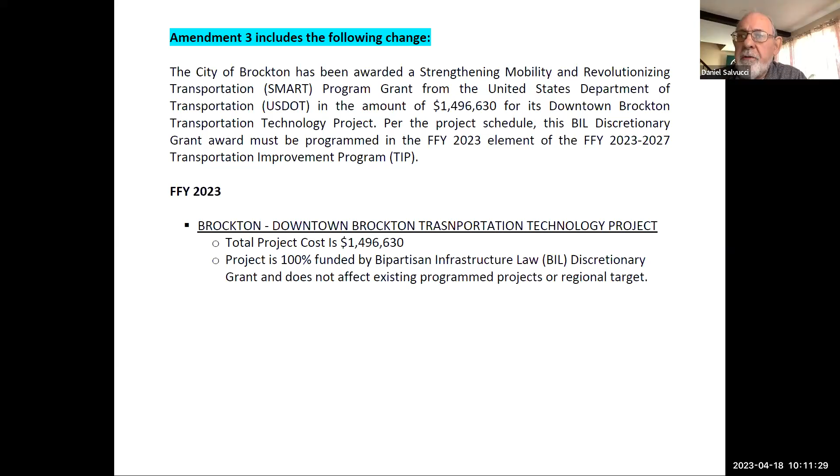Thank you, Bill. Any questions for Bill or the city? Seeing and hearing none, can I get a motion and second to release as presented today? I'll motion, Dan Salvucci. Is there a second? I'll second, Becky Coletta. Motion has been made and seconded.

Please call the roll. David Mohler, yes. Sean Handy, yes. Kamaya Parkin, yes. Lee Hartman, yes. Dan Salvucci, yes. Great job, by the way.

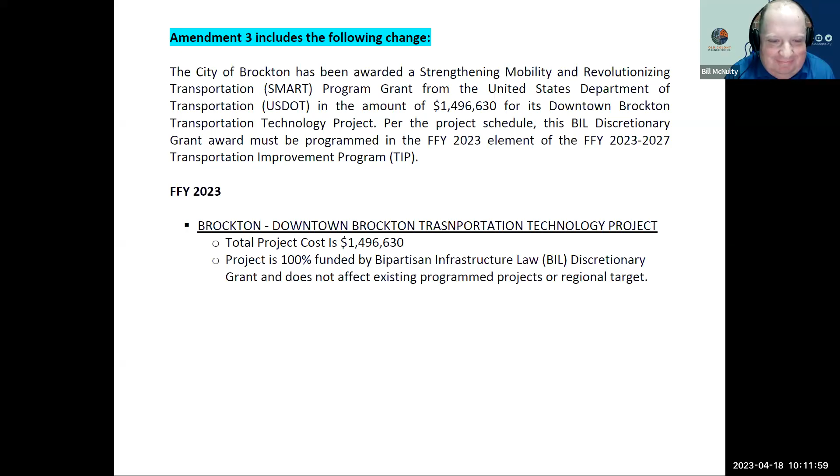Glenn Guyler, good, an enthusiastic yes. And Becky, very good, Coletta, yes. Motion carries. Thank you. Yeah, congratulations to the city.

Next item on the agenda is the development of the 2024-2028 Old Colony TIP.

Today I'm presenting the draft FFY 2024 to 2028 TIP that we're seeking to send out to public review and comment period. As you'll recall, at our last MPO meeting, we determined a preferred set of highway projects for this TIP. Since then, we've been preparing the actual draft document, and we're ready to send that out to public review and comment period. As you can see on the screen, the highlights of this TIP are $173 million in highway and bridge projects, and over 41 million in transit projects.

So we're very, very excited about that. If you want to go to the next page, Sean, thank you. I'll just walk through each program year and highlight what's programmed each year. In FFY 2024, City of Brockton has intersection improvements at Center Street, at Cary and Lyman. Also in Brockton, Route 123 at Plymouth Street, with signalization improvements there. In the town of Plympton, we have a bridge replacement project, the bridge on Winnetuxet Road over the Winnetuxet River. And in Stoughton, as I discussed earlier, phase 2 of the Route 138 corridor project.

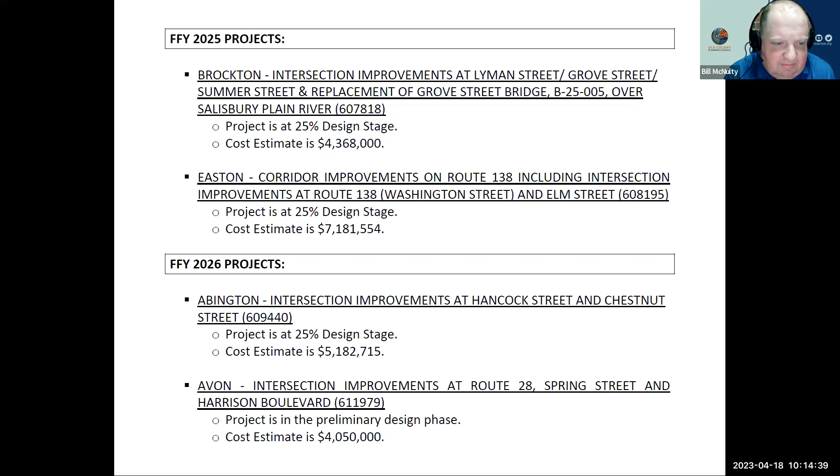In FFY 2026, we have in Abington, intersection improvements at Hancock Street at Chestnut Street. And in Avon, intersection improvements at Route 28 at Harrison Boulevard and Spring Street. That's a major safety improvement project, so excited about that.

Next one, in Duxbury, traffic signal installation at the Route 3 ramps at Route 3A, right on the Duxbury Kingston line there.

FFY 2027, we have a project in Abington, intersection improvements at Randolph Street and Richard A. Fitts Drive, which is Route 139 at Chestnut Street and Old Randolph Street. In Hanson, we have a corridor project, corridor improvements on Route 14. In Duxbury, we have a bridge replacement, the Powder Point Avenue Bridge over Duxbury Bay, 70 million.

And then finally, in FFY 2028, we have a project in Abington, intersection improvements at Route 18 at Route 123. In City of Brockton, intersection improvements at Route 123 Belmont Street, at Pearl Street and Stonehill Street. In Duxbury, this is phase 2 of that Powder Point Avenue Bridge replacement.

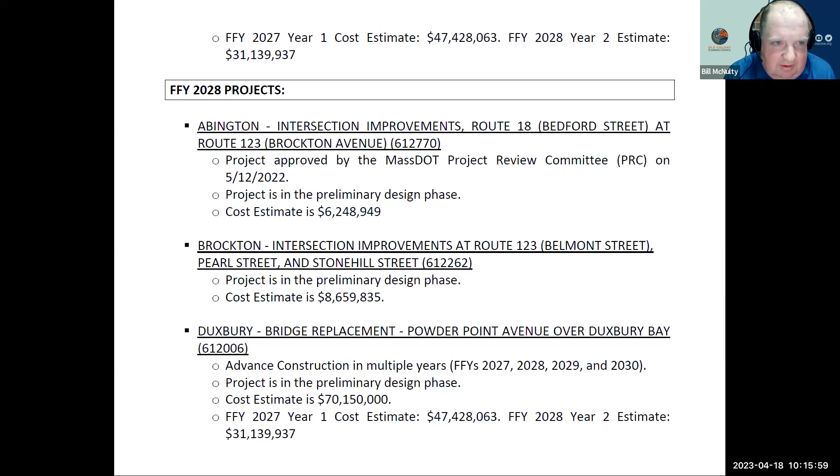Next page. In Hanover, Route 139 corridor improvements, right there in the town center, at Main Street, Center Street, and Silver Street. In Kingston, bridge replacement, Smith's Lane over Route 3. And in Stoughton, intersection improvements at Canton Street, School Street, and Summer Street.

So all these projects, right now, as of right now, they're looking in good shape to meet programming in these targeted years.

This set of TIP projects was developed in full cooperation and collaboration with stakeholders and project proponents. And we got a good mix of projects here, and I'll note that this is just the highway side that I'm presenting here, but on the transit side, we have some great transit improvements as well.

In addition to the normal maintenance and operation stuff, I think the centerpiece of this TIP, at least on the transit side, and Glenn alluded to this earlier, is moving towards a zero emissions fleet system. So incrementally phasing out their diesel and hybrid buses and replacing them with fully electric buses. This TIP accommodates the purchase of several of those electric buses, which is very exciting news for the region, air quality, and all that good stuff.

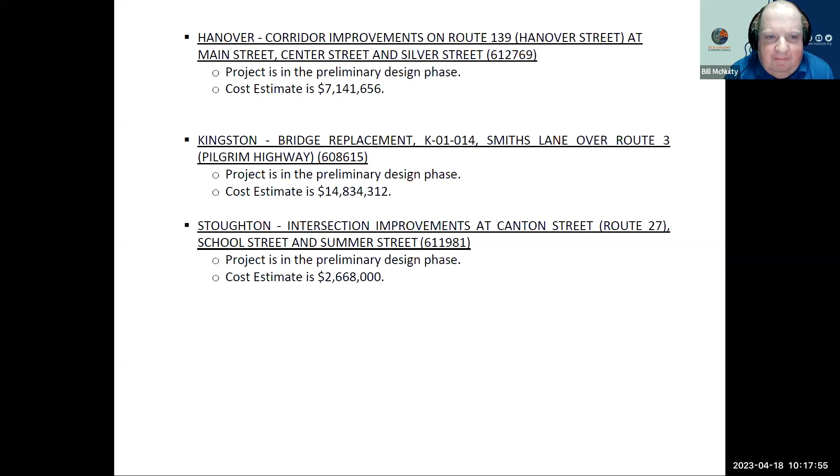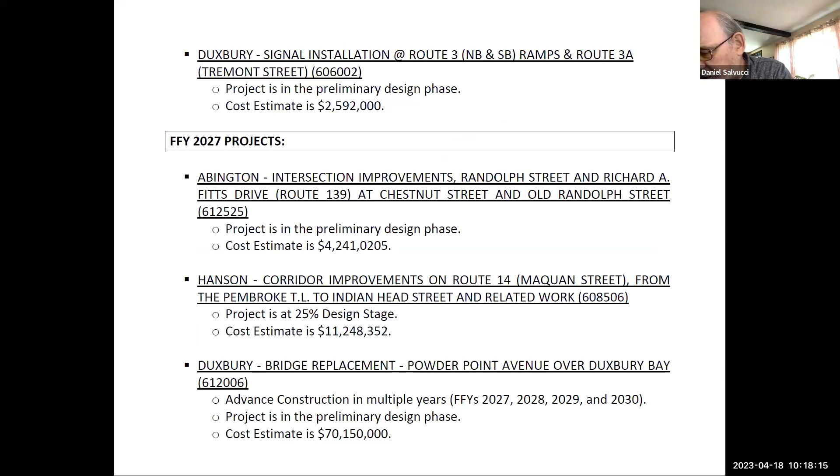Thank you, Bill. If I may, go ahead. Question, Dan from Whitman. On the Hanson project on Route 14, I know it's still at 25% design, and I know there's some issues with the towns dealing with it. Has there been any movement at all? I'd like to report back to Don Howard and let him know exactly what's going on, where he introduced this project years ago.

Yeah, so there's definitely a lot of activity behind the scenes. Right now, I know the town is still working to secure funding for an underground utility exploration that needs to be done. And then beyond that, there are some right-of-way issues that the town will need to address, but there is definitely movement on it, and there's a lot happening behind the scenes.

Okay, I'll let Don know. Thank you very much, Bill. Any other questions for Bill? I have a question.

On the Duxbury Bridge, Powder Point Bridge project, the 70 million, does that count against projects, or is that separate money? I know we've heard about it and talked about it in other meetings, but I just can't remember if it comes out of our regular TIP money or if there's special money for that bridge.

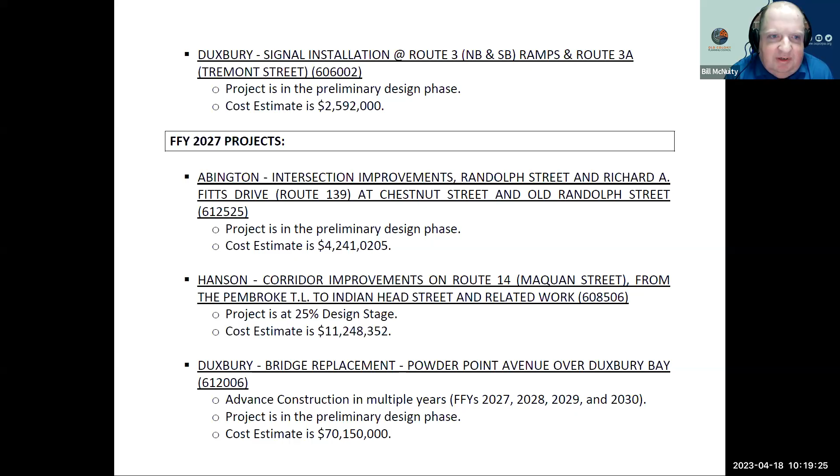Yeah, that's an off-system bridge project, so it's not coming out of the regional target. It's kind of separate money. So it's programmed in our TIP, but it's not coming out of our regional target. That's what I thought, I just wanted to make sure. Good, thank you, that's good.

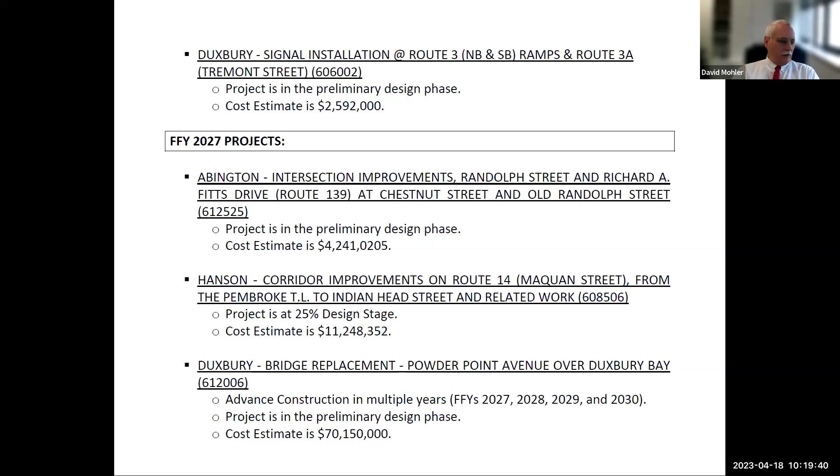Yeah, any other questions? Seeing none, can I get a motion and a second to release the TIP as presented today for a public review process? I'll make that motion, Dan from Whitman. Is there a second? Is there a second to release the TIP? I'll second. Second, thanks, thank you. Motion has been made and seconded.

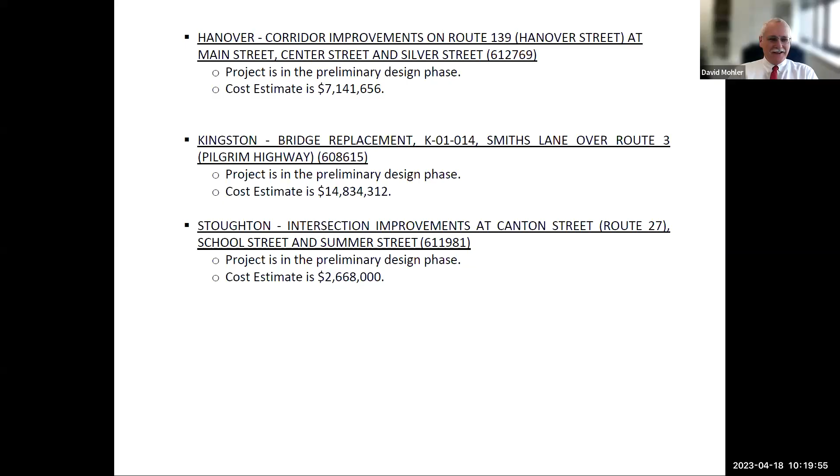Please call the roll. David Mohler, yes. Sean Handy, yes. Kamaya Parkin, yes. Lee Hartman, yes. Dan Salvucci, yes. Glenn Geiler, yes. Becky Coletta, yes. Motion carries. I'm trying not to talk when my dogs are barking.

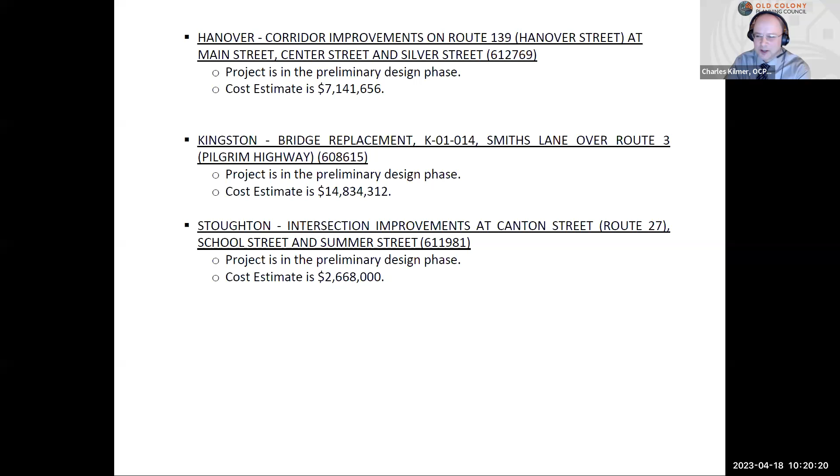We are a pet-friendly office, so... Is it a service dog? I don't know. Thank you, everyone.

Thank you. The next item on the agenda is a discussion of the certification of the Old Colony MPO transportation planning process. Is this you, Charlie? Yes, thank you, David.

So on an annual basis, one of the items before the MPO is a self-certification of the Metropolitan Transportation Planning process. There are several items where the MPO self-certifies compliance with the Metropolitan Planning Regs, such as having an anti-lobbying statement, and operating a process in a non-discriminatory manner.

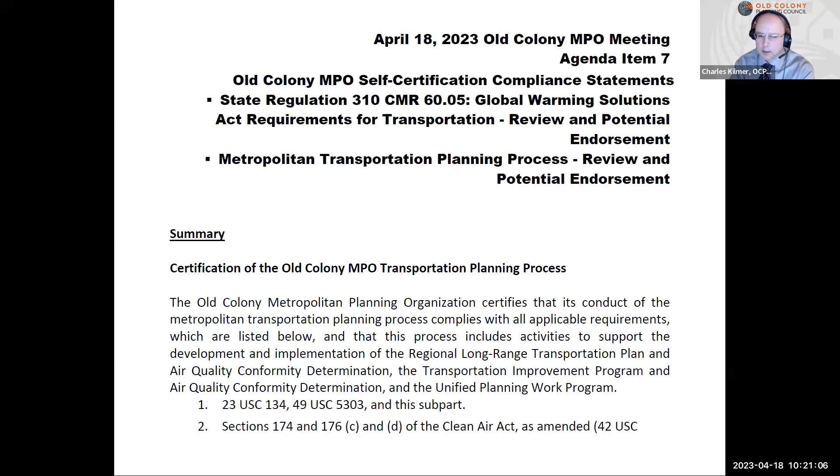Next slide, please. You can see several items here through item 10, compliance with the Older Americans Act, and so forth, including Section 504 of the Rehabilitation Act.

As you see these on your screen, these are things abided by the staff in its metropolitan planning process as we develop the TIP, the long range plan, the public participation plan, the unified planning work program, and in our day-to-day operations. You might be asking yourselves, well, who ensures compliance with these?

Our friends at USDOT, through the Federal Highway and Federal Transit Administration, conduct a transportation planning certification review every 4 years, where they go through these items and look for specific documentation of how we're implementing our process in adherence to these. Next slide, 11 items.

As luck would have it, we have just started our federal transportation planning certification review with our federal partners, and it's likely to conclude sometime in August with a final report.

I would also say that our partners at MassDOT, through the Office of Transportation Planning, closely adhere to providing guidance and guidelines with respect to the planning regulations.

As we're doing the 3C document cycle, they're very good about providing advanced materials and having an annual MARPA MassDOT annual meeting where they talk about specific guidance and review of previously approved certification documents, with any recommendations from the federal partners. So this is an ongoing process, and we report from a staff perspective that we comply with these 11 items.

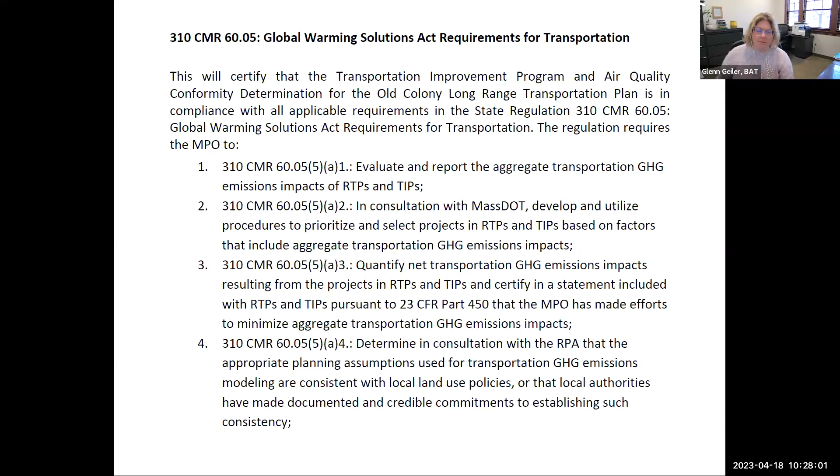Please call the roll. David Mohler, yes. Sean Handy, yes. Kamaya Parkin, yes. Lee Hartman, yes. Dan Salvucci, yes. Glenn Geiler, yes. And Becky Coletta, yes. Thank you, motion carries.

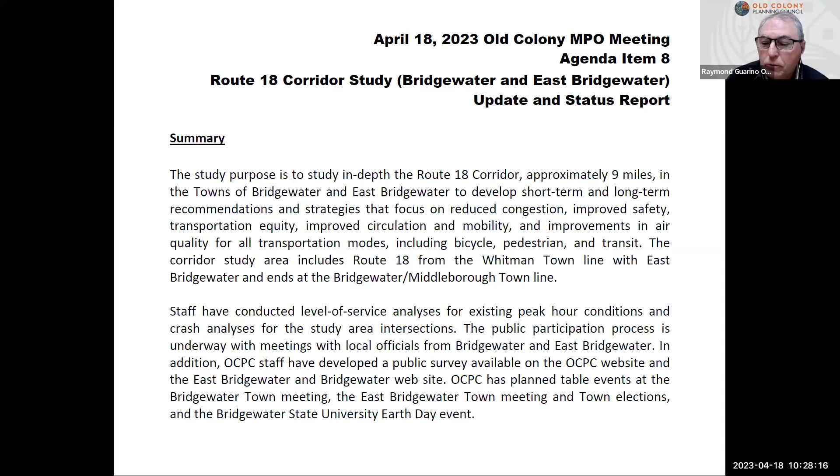Next item on the agenda is a presentation on the Route 18 corridor study. That would be me, Mr. Chairman. Okay, whenever you're ready.

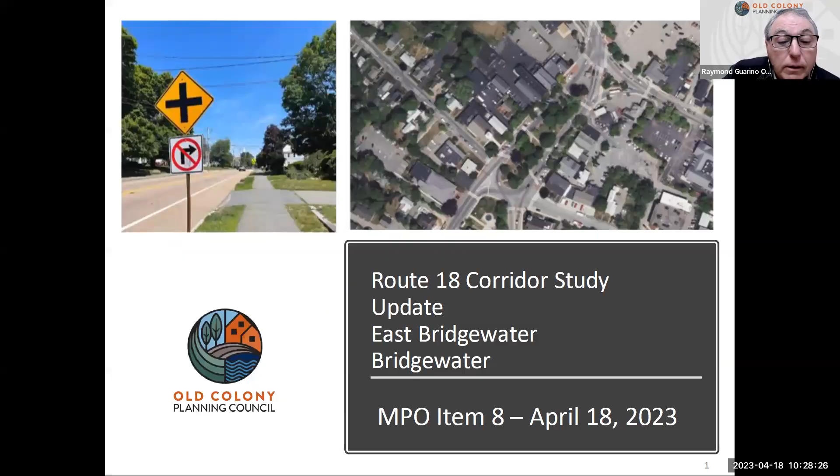Sure, next slide please. I have a presentation that updates where we are on the Route 18 corridor study, what we've done so far, and what we plan to do, and where we are in that study process.

Our corridor study consists of Route 18 in East Bridgewater and Bridgewater. The purpose is to address traffic congestion, improve safety and mobility for all road users, and to develop short-term and long-term improvements that could possibly end up on the TIP.

It's Route 18, in just the two towns of East Bridgewater and Bridgewater. So we're looking at traffic volumes, bottlenecks, the two major bottlenecks being East Bridgewater Center and Bridgewater Center, and peak hour levels of service, safety, and the number and types of crashes.

We're looking at the condition of the built environment, including pavement, sidewalks, pavement markings, traffic control, transit operations, bicycle and pedestrian safety, truck operations, and an important aspect is the changing land use and zoning and potential impacts of land use changes, as well as environmental conditions. We expect the final report in September 2023.

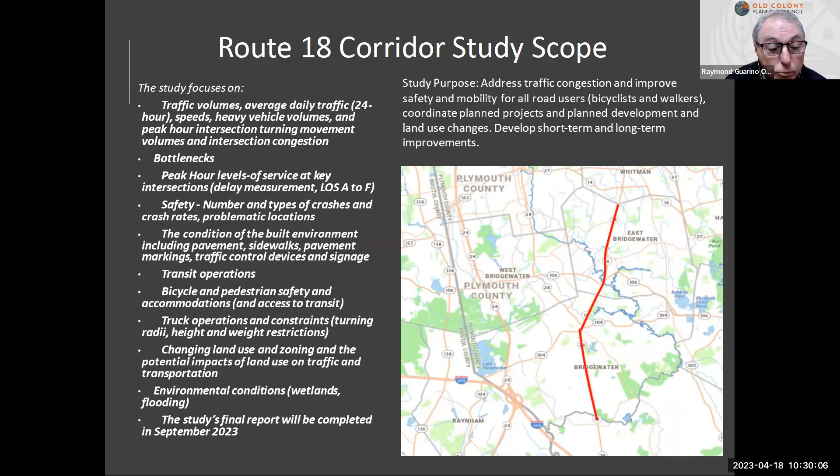We're still in the public outreach process. We have a public survey already up on our website and the towns' websites, and we're doing some table events. We'll be at Bridgewater State University for Earth Day to tell the public about this study, as well as at town election day and town meeting.

So we've done existing conditions, and we're going to look at future no-build and build conditions, using our traffic model for that over the summer.

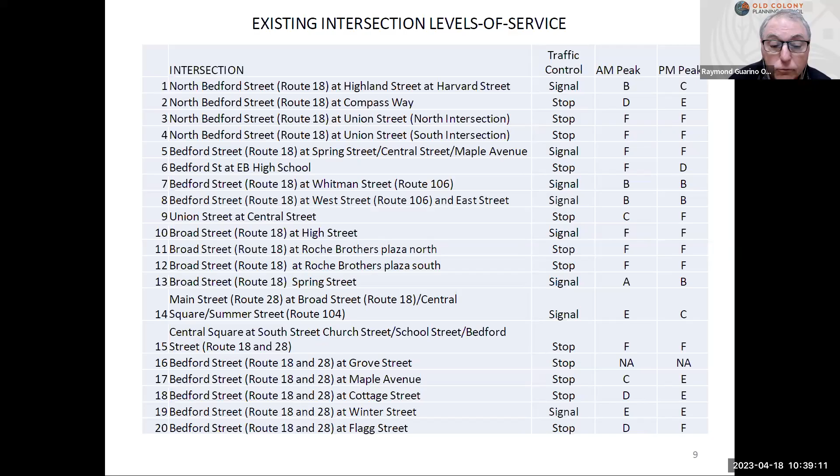So we have the existing level of service conditions.

For the no-build condition, this is in East Bridgewater just at the Whitman line. There's potential for future development with the extension of the sewer into the new sewer district, and where there's new development coming in, a 400,000 square foot warehouse. Compass Medical is expanding too. There's the intersection of Highland Street at Route 18, which is already a skewed intersection, and even though the level of service was acceptable under current conditions, there are long queues in the afternoon that we observed. That intersection is going to be impacted by the expansion of the medical center, as well as other development along this corridor.

So that's going to be part of our no-build analysis. What we will do is get the trip generation and assign it on the roads and through the intersections to help us determine future levels of service.

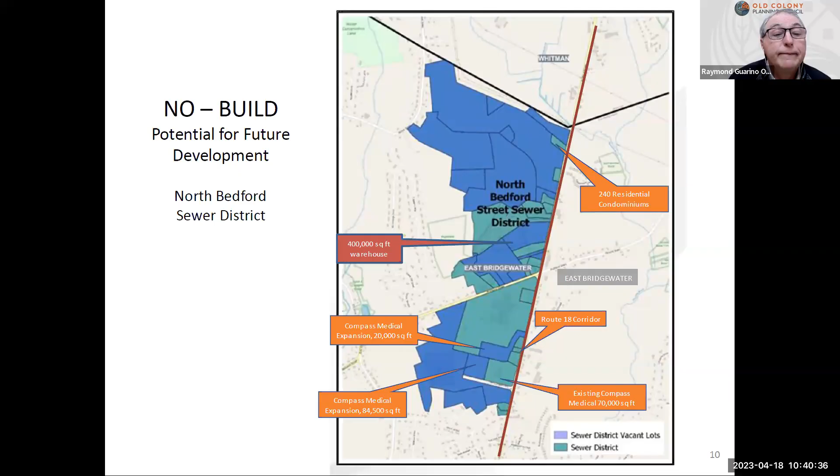This is another map that shows the dotted line, showing the extension of the sewer from Brockton into East Bridgewater, into the Compass Medical Center.

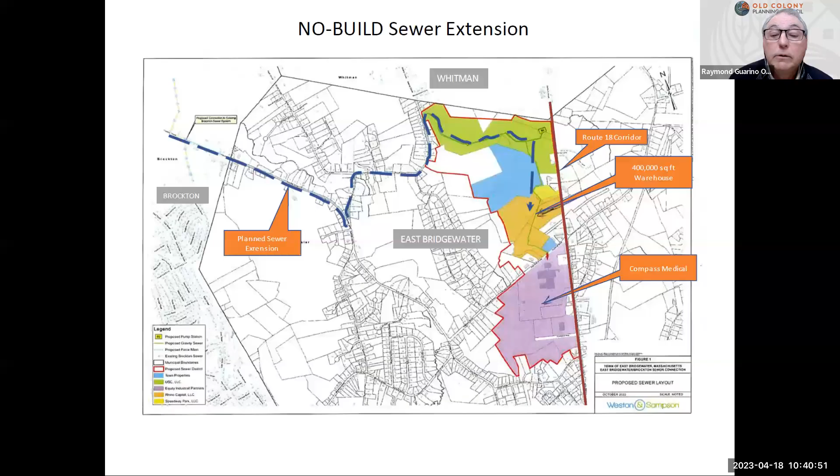This is the intersection I was just talking about. Our build will include level of service for the build conditions, adding the impact from the sewer extension. We'll use our traffic model to get a future no-build, then add the trip generation from projects we know are definitely coming in. It needs updated signal timing and phasing over the existing fixed setup, and a future build scenario could actually be reconstruction of the intersection to better align it if possible.

There would also be some short-term improvements, such as improving the signal timing and phasing in the interim.

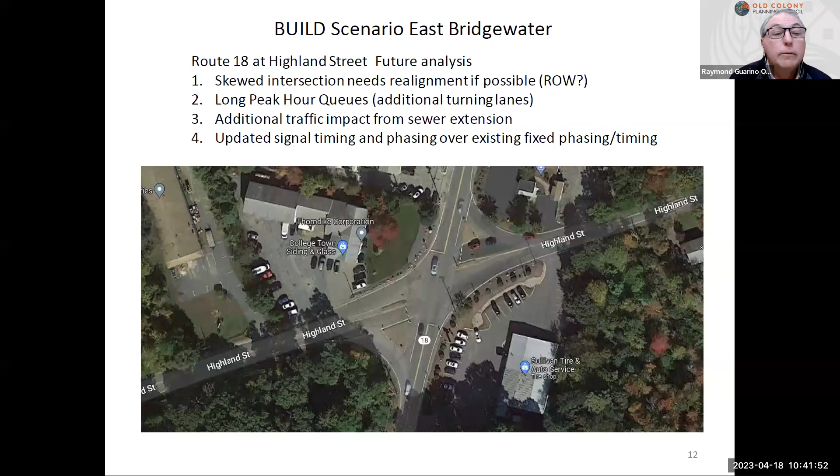Another major bottleneck would be Bridgewater Center. This has long delays under existing conditions, with long queues especially along Central Street and Route 18. It needs updated signal timing and phasing, and pedestrian and bicycle accommodations are poor. Down Central Street to the southeast there are a number of schools - middle school, elementary school, high school - so in the afternoon there's a lot of pedestrian activity. I think there could be more, but pedestrian safety is a concern for people in the town, and it needs improvement in that area.

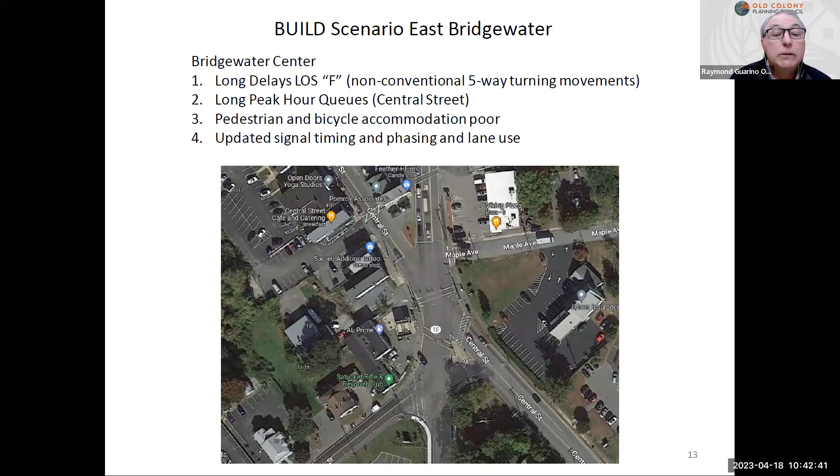We're going further south, still in East Bridgewater, to the intersection of West Street and East Street. West Street is Route 106; East Street is not 106. 106 goes left, north up to Route 18, combines with Route 18 and Route 106, and then Route 106 goes off again on Whitman Street.

Again, the alignment is poor here, and the signal timing and phasing is antiquated. A big part of this problem - we've actually talked to the town before about this intersection - is there's a lot of weaving as people follow Route 106. They're going south on Route 18 and they go right onto West Street. There's that free right, and a lot of weaving of cars at high speeds, which ends up in crashes, especially with the misalignment of East Street at this intersection.

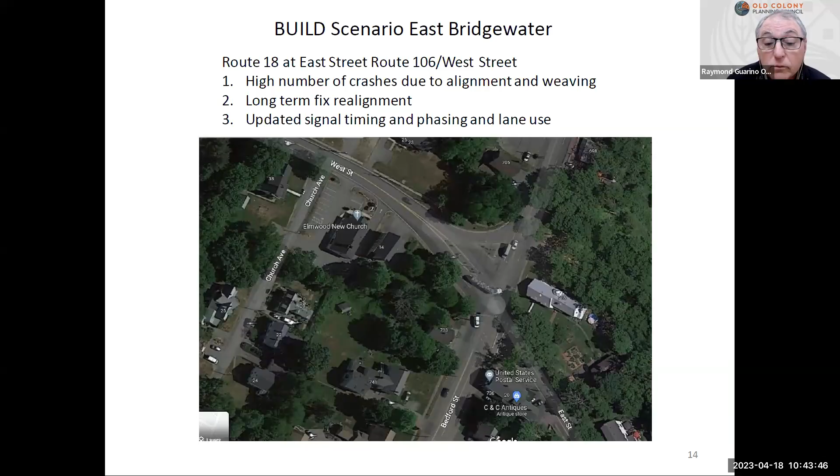We had a meeting, and they want to see Central Square, which currently has two lanes going north and two lanes going south with angled parking, redesigned. They would like the sidewalks extended - on one side to 20 to 25 feet, on the other side to 20 feet for the businesses. They want restaurants to have dining on the sidewalk, wider sidewalks, and to make it more pedestrian friendly, including rapid rectangular flashing beacons at the crosswalks. This also means removing the angled parking, instead having parallel parking, with one travel lane northbound, one travel lane southbound, and a bicycle path going up and down. There's about 60 feet of right of way on the north side and about 50 feet on the south side, so this could all fit in.

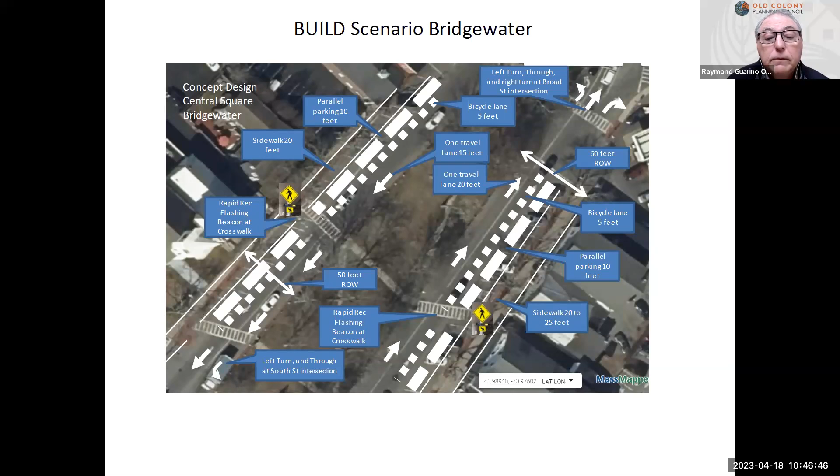This is the south side of Central Square in Bridgewater. We at Old Colony Planning Council, the staff, Ko Jung and I, looked at how we can make it better, because right now there's kind of two intersections here. Vehicles treat it sort of like a roundabout, with a yield sign going north, which is level of service F during the peak hour. On the southbound side going into the oval, it's also level of service F. I think it's a stop sign there now.

We looked at a couple of different concepts, putting a traffic signal at the south end with 2 phases. We would open up the southbound lane to 2 lanes. It's 1 lane through the oval now, but we'd open it to 2 lanes, so those going on South Street could go through, while those turning left around the oval would have a traffic signal, and those coming north from South Street into the oval would have that same signal. In this concept, we would not signalize the other intersection where North Bedford Street comes in. It would still be a yield sign, with right turn in and right turn out into School Street, and then they would merge into one lane.

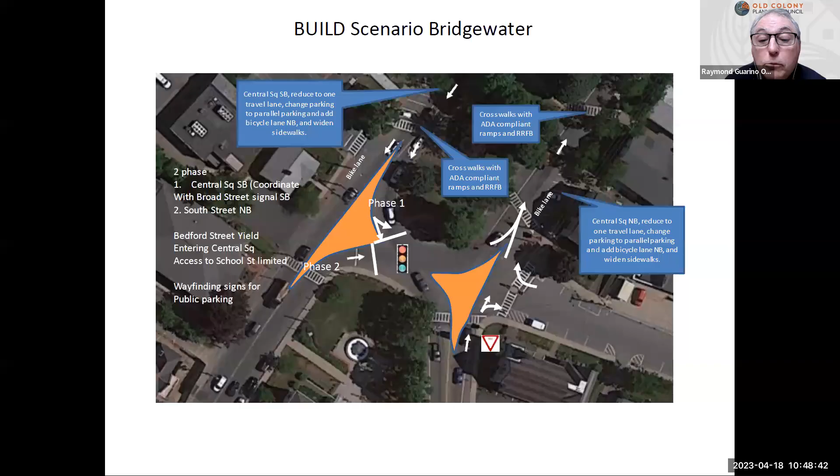As I said, these are concepts right now, and we're going to look at the levels of service. The next one is similar, with the traffic signal on the south side, but it would also give vehicles coming in on North Bedford Street a signal there. It would still be right turn out from School Street, but you would be allowed in to School Street. The previous concept did not allow vehicles into School Street. I put this one in because the town expressed interest in having School Street as a connection to BSU, so they'd probably want access through there, whereas the previous one didn't have access onto School Street. These are concepts we're going to present to the town. We're going to do the level of service analysis - we haven't done that yet for the future - and see what they think about these.

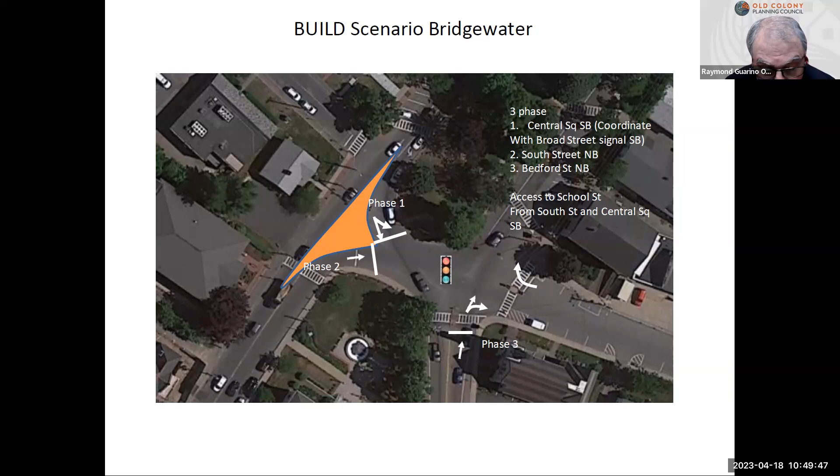So our next step is to discern the potential traffic and level of service. We're going to be using the TransCAD model to analyze the future scenarios, and in consultation with the stakeholders, test the potential improvements, finalize the improvements, and complete the draft report for review and comment from the stakeholders. Our final report is due the end of summer 2023. I think that's the end. If anyone has any questions or comments, I'll be happy to try to answer them.

Thank you, Ray. That was a very detailed, excellent report. Any questions for Ray?

A comment, if I may. I did live in Bridgewater for about 12 years, both as a student and then just decided I liked the town and wanted to go back and live there. I'm so grateful that you guys are taking a look at that Central Square area. I think prioritizing perceptions of safety for students and other residents is really important, that intersection in the center of town. There are some great local businesses there, but I know it's not even necessarily that it's unsafe, but that it's perceived to be an unsafe space for pedestrians, especially looking at those crosswalks, which are hidden right now by vehicles pulled into parking on both sides there in the center.